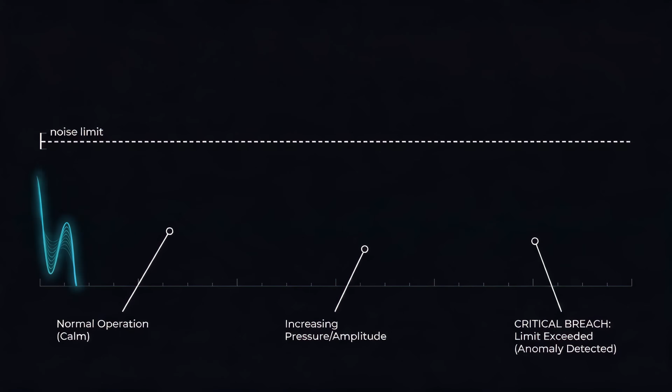Engineers could build the speed. They couldn't build the silence. The boom only grew worse the faster they went, a hard ceiling on the whole project. So how do you beat a problem that grows with every kilometer of speed?

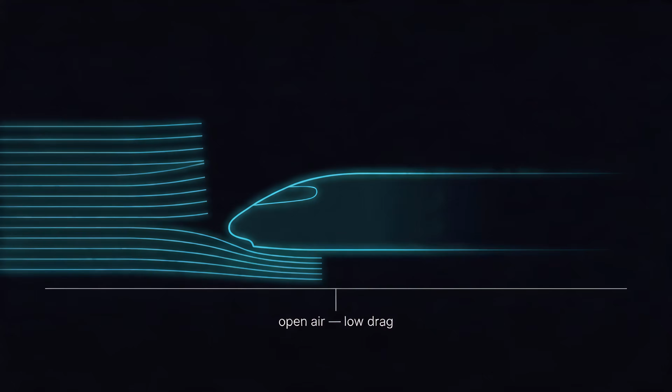For decades, the answer looked obvious. Make the nose pointed, make it look like a bullet. And in open air, that works. A long nose slips through the sky with little trouble. But a tunnel is not open air. Inside one, the train becomes a piston in a tube.

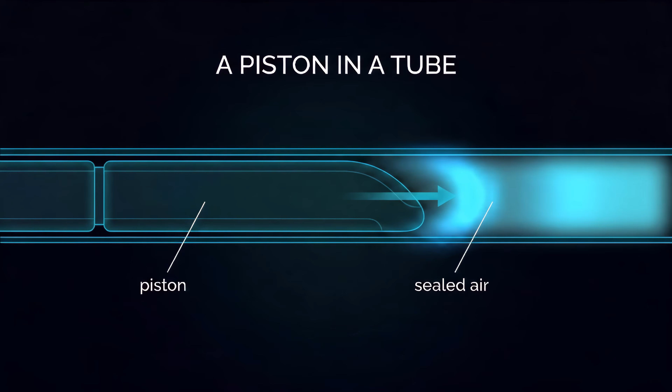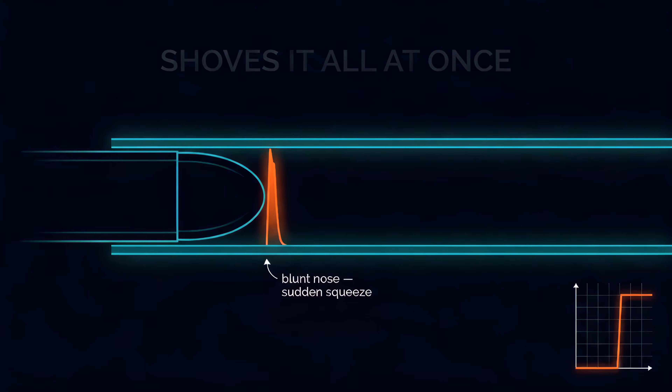The air ahead can't slide off to the sides anymore. The walls are right there, inches away. So it piles up in front of the nose, in a rising column of pressure. And the nose shape decides the one thing that matters most here: how suddenly that air gets squeezed. A blunt, bullet-shaped front shoves the air all at once. It builds a steep wall of pressure that runs the length of the tunnel at the speed of sound, and detonates out the far end.

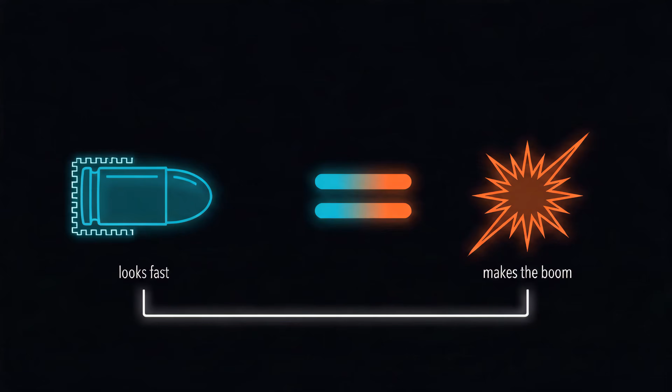The shape that made the train look fast was the shape making the boom. And the harder they pushed, the worse that bargain became. Here is what made it a wall and not a speed bump.

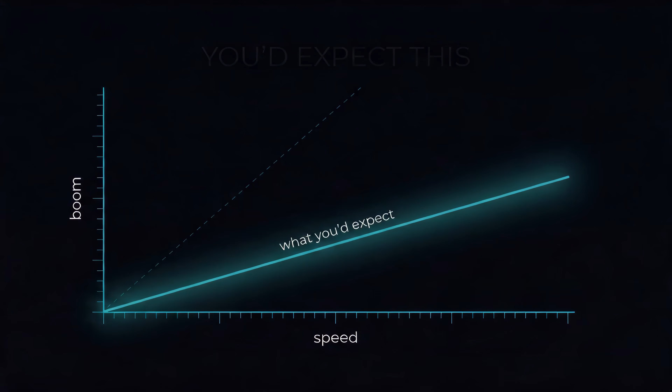The boom doesn't rise in step with the speed. By J.R. West's own reckoning, it rises with roughly the cube of it. Push the train 10% faster, and the pressure wave doesn't climb 10%. It climbs by a third or more. In theory, double the speed, and the boom grows around 8-fold.

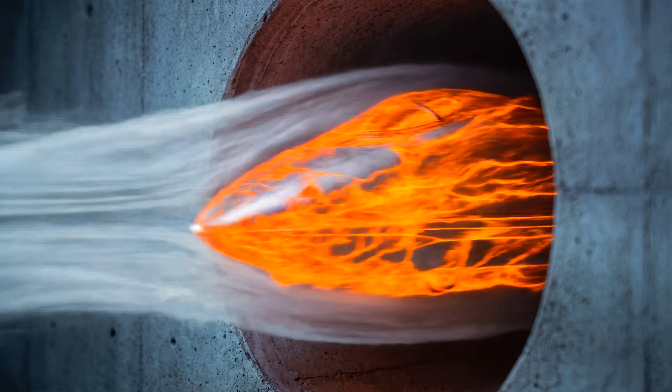So every kilometer per hour they added brought a punishingly larger bang. There was no brute force way out. A bigger, blunter machine only made a bigger bang. The team ran test trains and watched the numbers climb past anything the neighbors would accept. Those complaints from 400 meters out were already coming in.

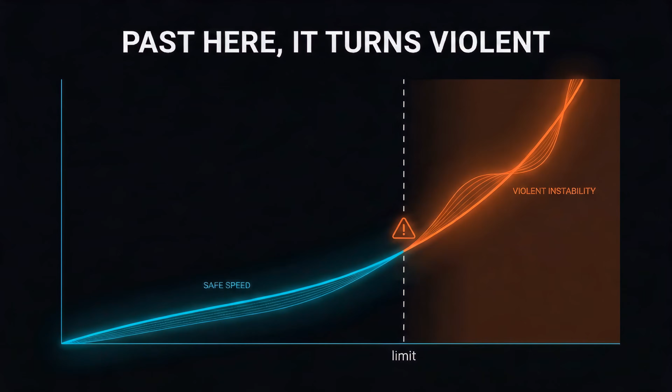Eventually, they stopped. They gave up running tests above 350 kilometers an hour, because past that point, the boom was simply unacceptable. The speed was sitting right there. The tunnel wouldn't let them use it.

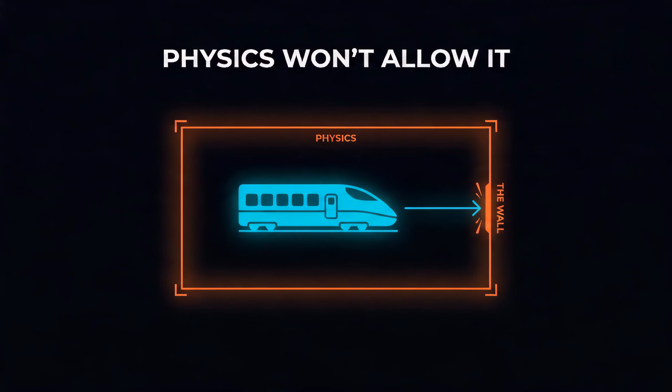The man leading the project, Eiji Nakatsu, had an unusual second life. He was a birdwatcher, a member of the Wild Bird Society of Japan. And one of his young engineers said something offhand that stuck: when the test train shot into a tunnel, it felt as if the train shrank. Nakatsu turned that over. A body slamming from open space into a wall of resistance.

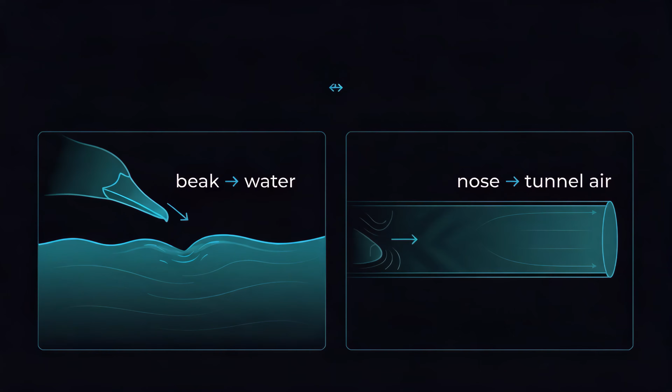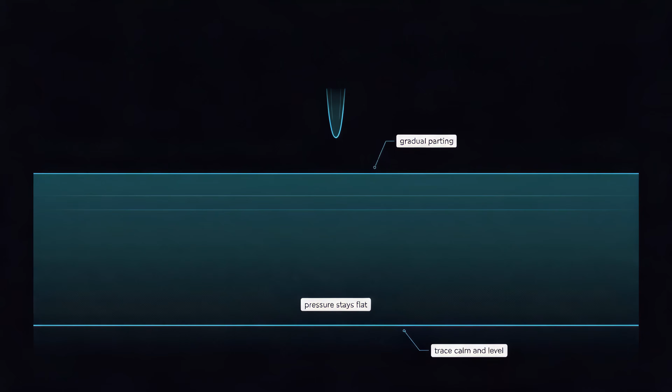He had seen that before, not on a railway, but at the edge of the water. A kingfisher hunts by dropping out of the air into a river. Air, then water, a medium 800 times denser, in a fraction of a second. By rights, it should land like a belly flop. It doesn't. It enters almost without a splash, because its long, tapered beak parts the water gradually instead of slapping it.

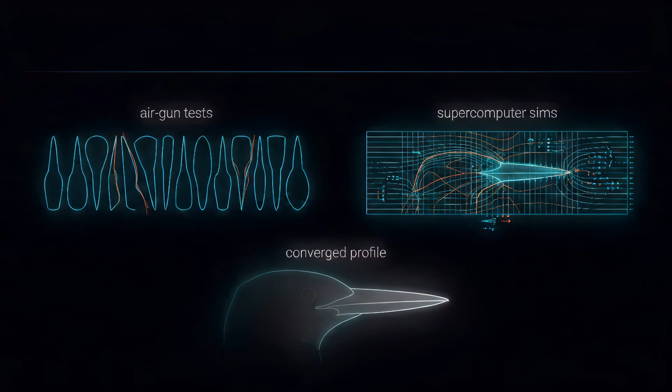So the team fired model noses of many shapes into a pipe and ran them through a supercomputer built for space research. The shape the math kept settling on, the one that made the smallest wave, was almost exactly the kingfisher's beak. Sit with what that means.

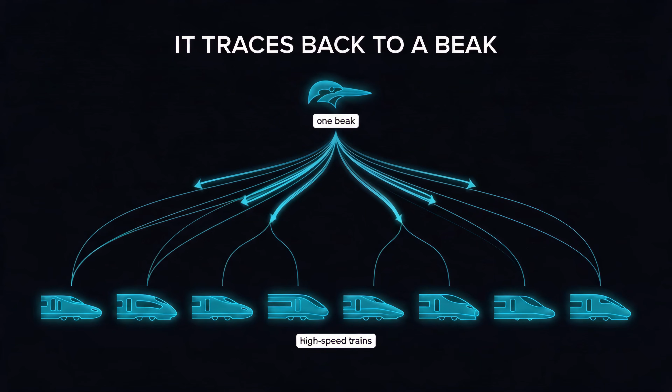A team of engineers armed with a supercomputer, searching for the single best shape to move between two densities, landed on an answer a bird was already born with. The kingfisher's beak isn't a metaphor here. It is a solution to the same physics, computed by evolution across tens of millions of years and written into the animal's body. Nakatsu didn't borrow a pretty idea.

He read an answer. There is something humbling and a little embarrassing in that. Our finest machine, chasing a shape a fish-eating bird had finished perfecting before our species existed.

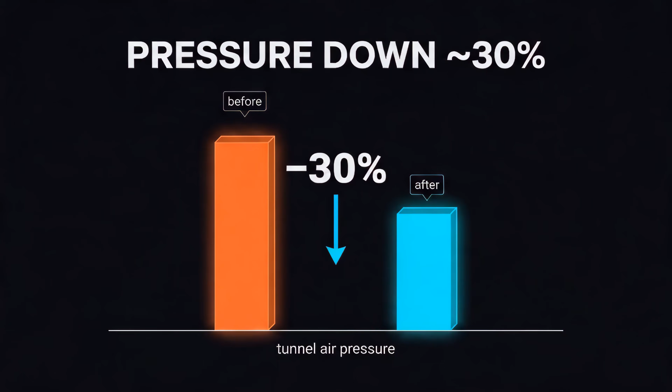And when they finally built the nose that way, the results read almost like a typo. By Nakatsu's own account, the redesigned 500 series cut the pressure wave by about 30%, drew roughly 15% less electricity, and ran about 10% faster than the train before it. One shape, quieter, cheaper, and faster, all at once.

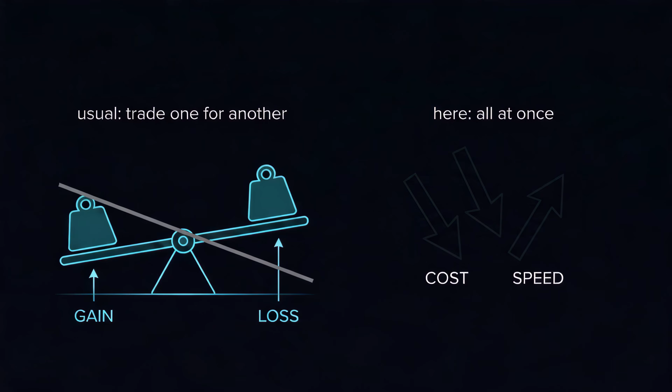So how do you beat a problem that grows with every kilometer of speed? You stop fighting the air, and you learn to part it. The train that once fired a thunderclap out of every tunnel now enters it the way a kingfisher enters a river. The same air, the same speed, and barely a splash.